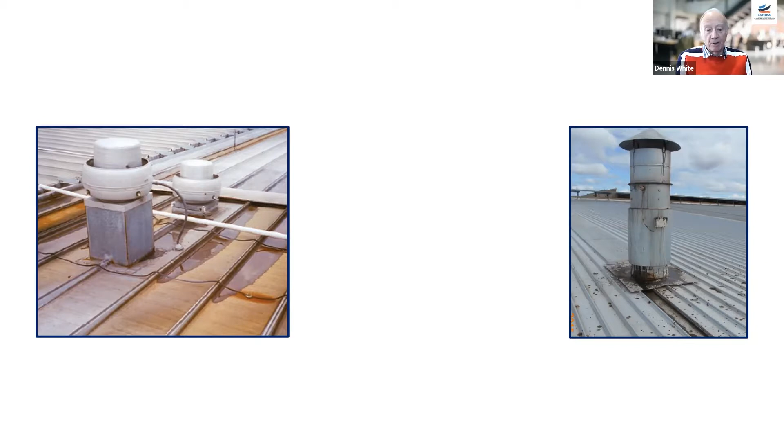And on the extreme right is an extractor above an eatery, which has a gutter on it. It's supposed to collect the gunge. Of course, because of lack of maintenance, it hasn't, and it's leaking out onto the roof, and that is a particularly corrosive agent as well. So if you've got those kind of scenarios on a roof where you're going to be putting PV panels, you need to make sure there's access. Well, there's no ponding, and if there is ponding, then that roof is a problem, and we'll discuss that later.

But the other thing is those extractor fans, whatever you do, don't cover up the downstream of where that stuff is flowing in the pan, because it'll be underneath the PV panels and they won't be able to get access to clean. Then the next thing we need to consider is in-plane roof.

Sorry to interrupt you there. We've just got a question from Johannes Hannekom asking, on an existing roof, if you do not have additional capacity for dead load, in your opinion, could you assume that your inaccessible roof allowance or live load of 0.25 kPa could be occupied as PV panels?

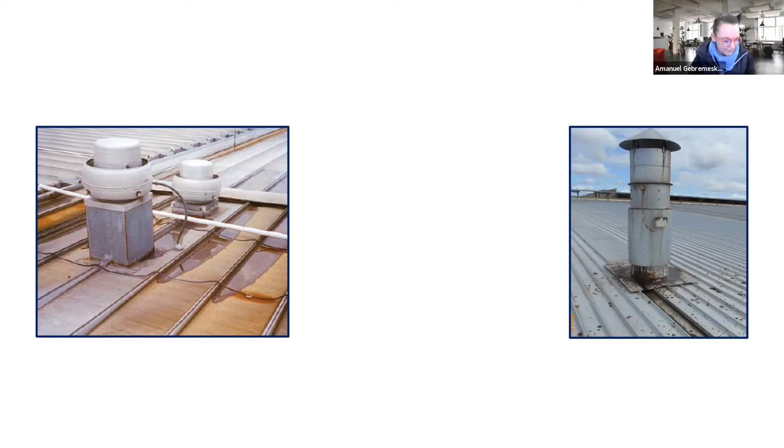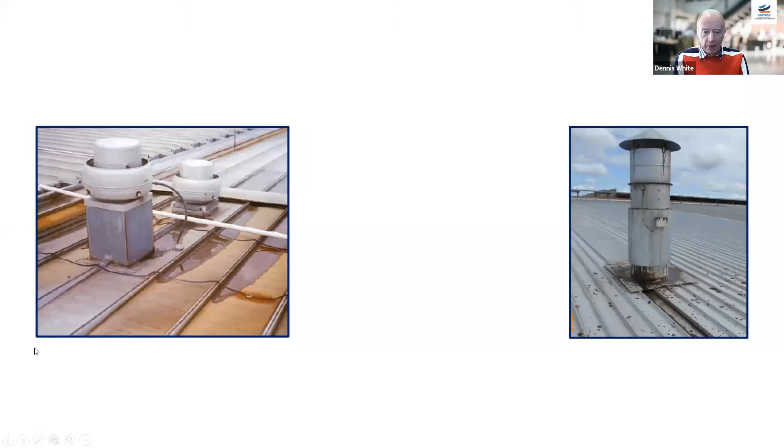So I'll be with you in a minute. Just need to flip my screen.

We had a question from Katlego, Dennis. Just if you could repeat the types of roofs that are not suitable for PV panel installation. That would be any galvanized, titanium zinc or Rheinzink, pure zinc type of coat or metal. That's a single homogeneous product, or weathered, site-painted, galvanized sheets.

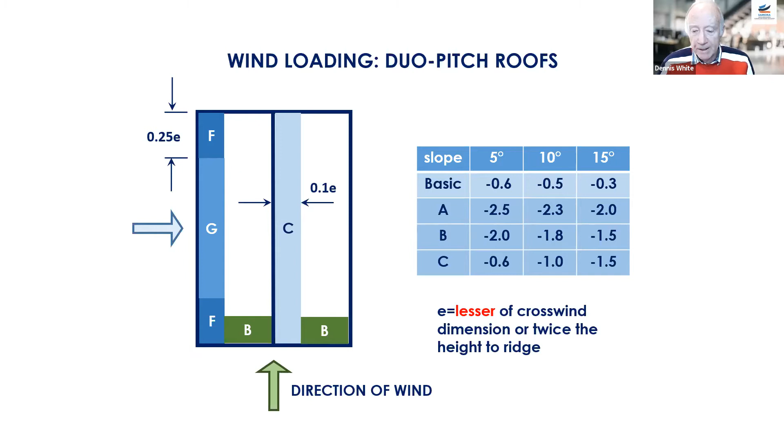And within that, if you're using galvanized, aluminium zinc or their painted alternatives or options, you may not use stainless steel fasteners. If you read their warranties and their literature, all the manufacturers of those coatings will tell you you cannot use stainless steel fasteners to connect items onto the roof.

Okay, and then the next aspect is, of course, that the brackets preferably should be attached to the ribs, not in the pan, for several reasons. There's a slide coming up where I show some examples, and I'll discuss the reasons why we don't want it in the middle of the pan unless it's going through into the supporting structure underneath the cladding.

The only occasion where we do recommend pan fixing is when you've got standing seam profiles. And then, of course, we recommend that you don't fix to the profile itself, you fix it to the supporting purlin underneath. And then another aspect to be considered is with your concealed fix, particularly if you've got extremely long sheets, those things are moving around quite a bit thermally, and you cannot attach the brackets within 100 to 150 millimeters of the center of the purlin where the attachment clip is, to accommodate the thermal movement of the cladding.

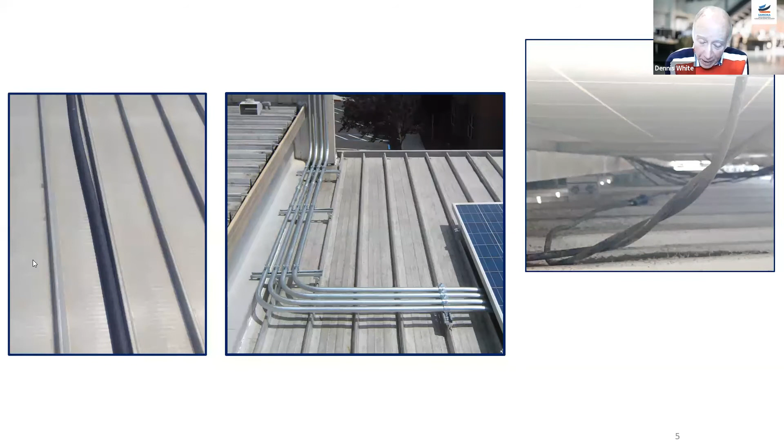Cables lying in pans, in contact, create corrosion pockets and also inhibit the flushing from rainwater to clean that surface, and plus they become a dam for small debris particles. And therefore we would recommend that everything is either in cable trays or on a system similar to that middle photograph, where it's away above the pan of the cladding. And even on the rib it can present problems, but at the very least they must not be in the pans of the cladding. Another aspect to remember is that if there are any copper components, there must be no runoff from copper, brass, tin, stainless steel components, because again, you're going to set up a bimetal corrosive scenario.

And then finally, another point is avoid penetrations through the cladding if you can. Rather run the cables up to where you've got a ridge flashing or over the side, but preferably do not try to make holes in the roof, with particular reference to the very long sheets of concealed fix, which move around thermally. So any hole or penetration through the cladding needs to be able to accommodate the thermal movement of that roof cladding relative to whatever that penetration is. And then, of course, the other thing is that the panels are properly earthed, because stray currents, again, will set up a rapid acceleration of corrosion of the cladding material.

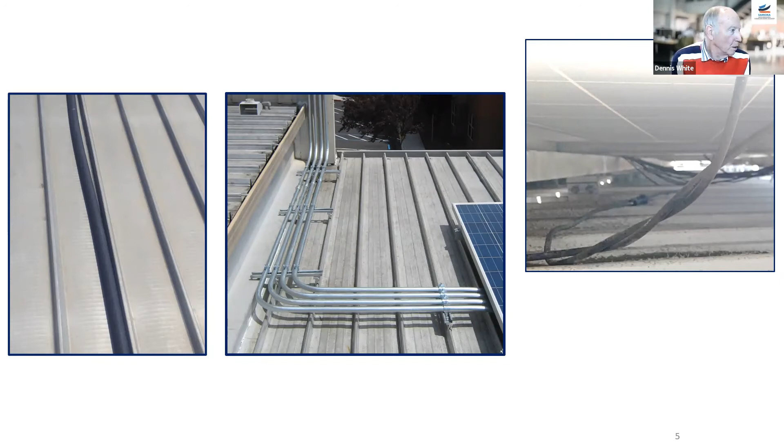And now if we go to slide 6. Sorry, just a sec there, I'll share now.

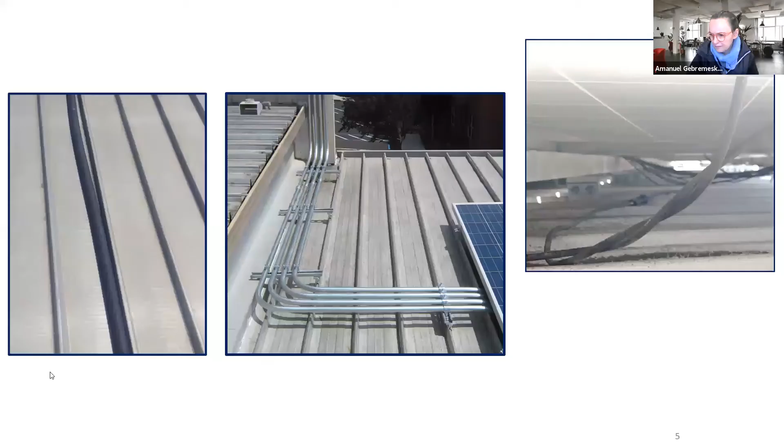We have a very high particulate fallout from the atmosphere, particularly if you're close to an informal settlement or railway installation or a freeway, and that needs to be washed out or flushed out on a regular basis. So that's something else that needs to be considered when determining the size and the extent of the banks of PV panels, that you are actually going to get this natural flushing. Otherwise, you're going to have to introduce a very regular washing of the roof.

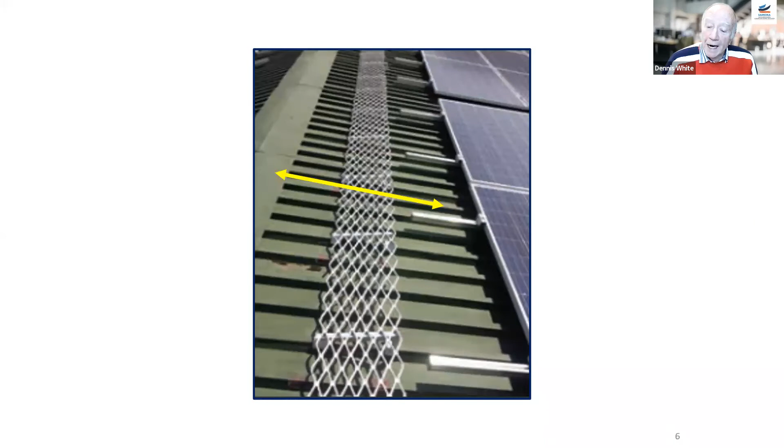Right, then if we go on to the roof work itself, the first thing that we need to discuss is walking on a metal profiled roof. If you're walking up or down the slope, please walk in the pans, not on the ribs. And if you've got a roof like corrugated iron, then please try and walk on 2 ribs rather than on a single rib to avoid buckling it.

And if you have to walk across the roof, try and do so within 300 millimeters of the purlin line, because otherwise, on a very large roof where the spanning capabilities of the profile have been stretched to the limit, it's inevitable that either you're going to induce a depression in the cladding, or worse still, you're going to get an indentation or a collapse of a rib that is going to need repair.

And then the other thing when it comes to roof work is cutting on the roof. The use of friction saws is a total no-no for a number of reasons. One of which is that the particles, if you're cutting steel, can be way above 800 degrees C, and they can burn into the paint surface, or they get themselves locked onto the metallic surface. And Denise, if you go to the next slide, please.

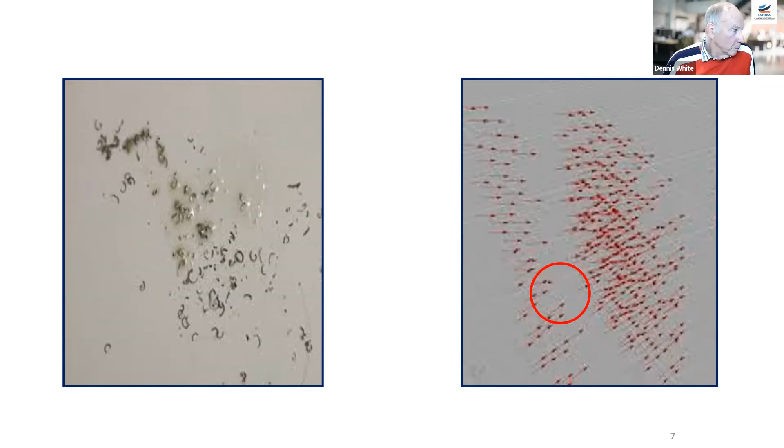Okay, so please, control swarf, it's really a deadly thing, and it can have a big impact on the warranty, because scratches from swarf that have been trodden into the surface or early corrosion would be excluded from any coil supplier's warranty.

And the final thing, when it comes to working on a metal roof, please carry things, don't drag them across the roof. You're messing up the coating, which can often be irreparable, but also you can cause indentation of the ribs. And again, that could be problematic. And if you have to replace a sheet that has been badly buckled and cracked where the ribs have cracked, on a roof where that sheet is 60 or 70 meters long, it's going to be an extremely expensive repair. And then if we go on to the next slide.

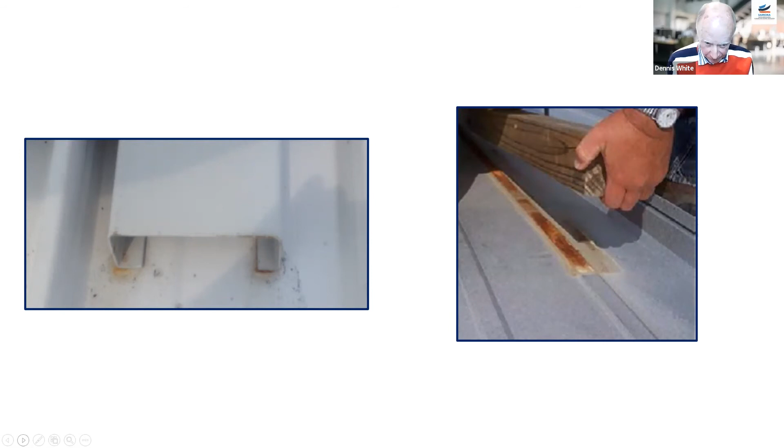If you do have to have something that is placed on the roof, like this, the one on the extreme left was a support for an air conditioning unit, you need to have something at the interface between the steel support system and the metallic surface underneath. This particular example was a white painted roof, and you can see the crevice corrosion that is occurring at that

interface between the two. And then of course the other thing is, please, no timber in any form on the roof for any period of time. Yes, you can have some dunnage there if you're storing your PV panels prior to installation, but no long-term interface between timber and the metallic surface, because you can see there the result of timber that has got wet. And you must remember the preservatives in timber are particularly corrosive if they're in the salt form.

Dennis, sorry, we've got a question in the chats. Emmanuel, do you want to just take that one and then I'll ask my question? Yes, just two follow-ups that I saw. One is relating to the relationship between slope and the distance from the roof.

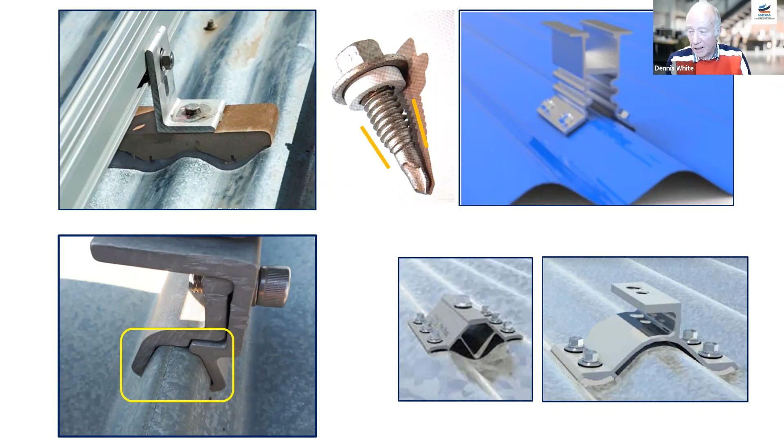So in using that type of detail, you need to make sure that the pull-out value of the fastener is going to meet the wind load criteria that's applied to the roof. We would suggest that you use the type of attachment bracket shown on the right-hand side of that image, because there the fasteners are not in tension pulling out, they're in shear. So you've got a far more stable type of connection. And particularly, it's not a single bolt or fastener. There's 4 for that particular design for corrugated.